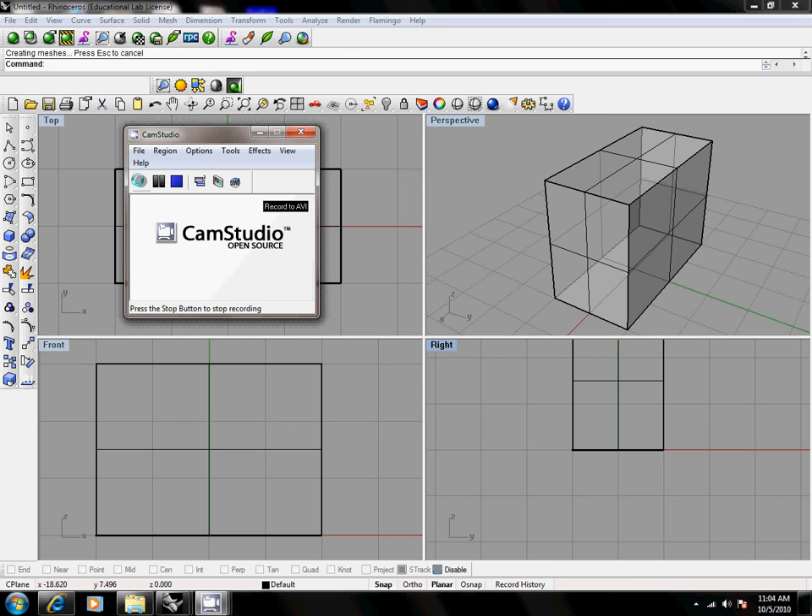Okay, so this is another tutorial for a new tool that you guys are going to use, called trim, and this is for making holes into surfaces.

So what we're going to do is open Rhinoceros, and we're going to choose small objects, centimeters.

In this case, what we're going to do is make a box, and then start creating holes around it, so we can simulate a computer. So we're going to maximize the top view, and I'm going to start creating a rectangle.

Remember that I should have snap and planar activated in order to do this. So I'm going to start at -20, 10, and make it 40 centimeters long and 20 centimeters wide. So here I created my rectangle.

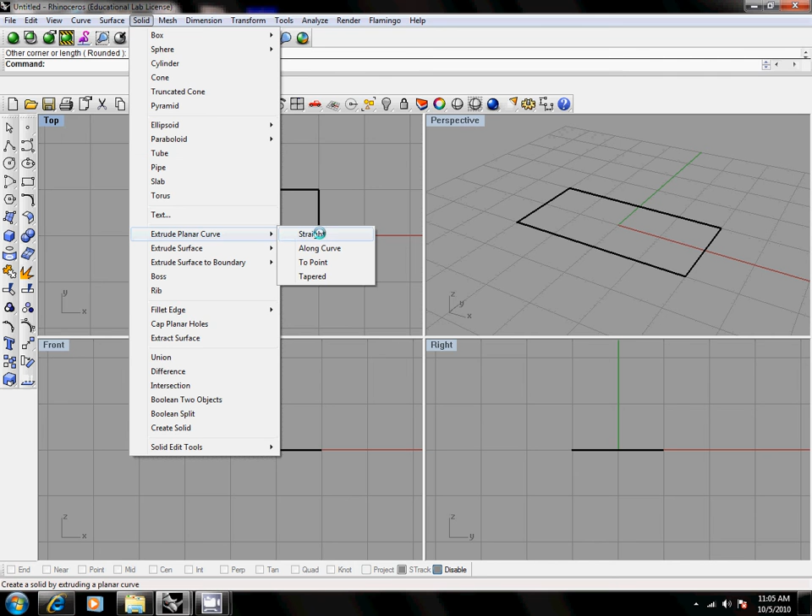Now I'm going to extrude this curve, extrude planar curve straight, and make a box. Remember to read the command line, it says select curves to extrude. So I select the curves, press enter, and extrude them 30 centimeters. On the front view I can count the 30 centimeters, and here I have my box.

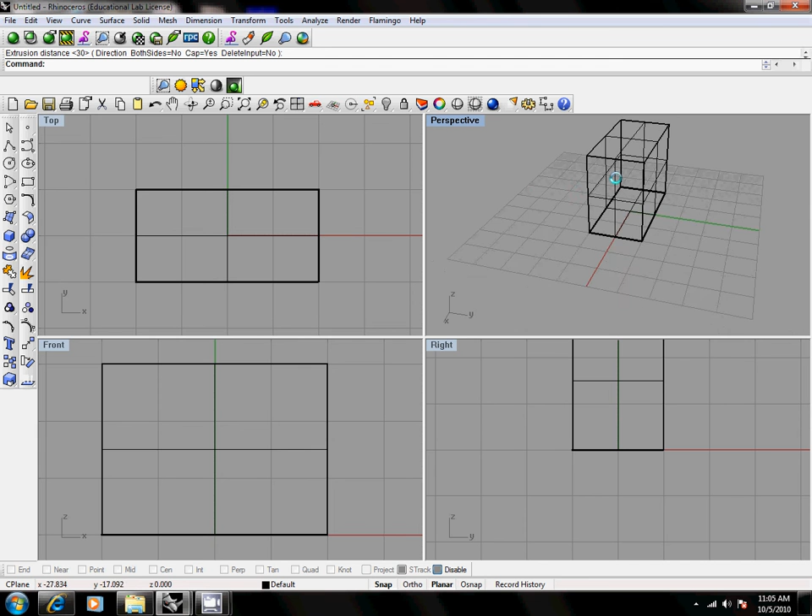If I right click on perspective, I can choose ghosted, so I can see a better view of the surfaces. So what I'm going to do is, I have my PC or my computer case, and I'm going to start making holes that will simulate the ones on my computer.

On the front view, what I'm seeing is actually the side view of the case. So I'm going to draw all my buttons and holes on the right view. I'm going to maximize the right view, and start drawing different holes.

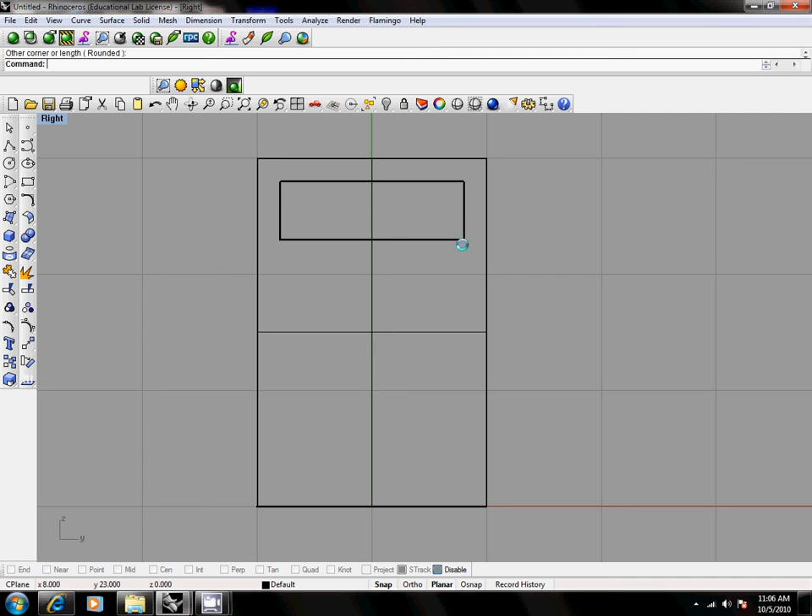So I can make a rectangle over here, and then I'm going to make a circle for the jacks. These are pretty big, but you guys can make them smaller - it's for you to know. So I have the jacks over here.

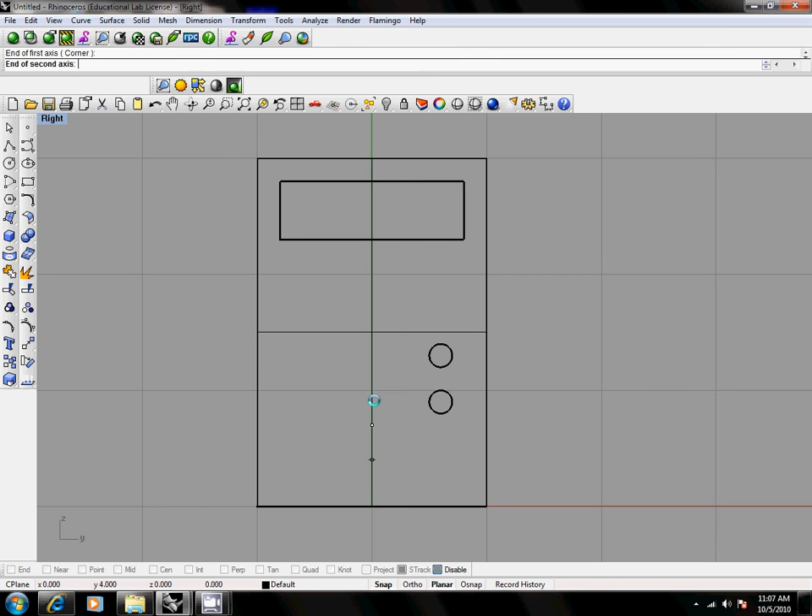Then I can make an ellipse for the power button. So what I'm going to do is make holes out of these 4 curves.

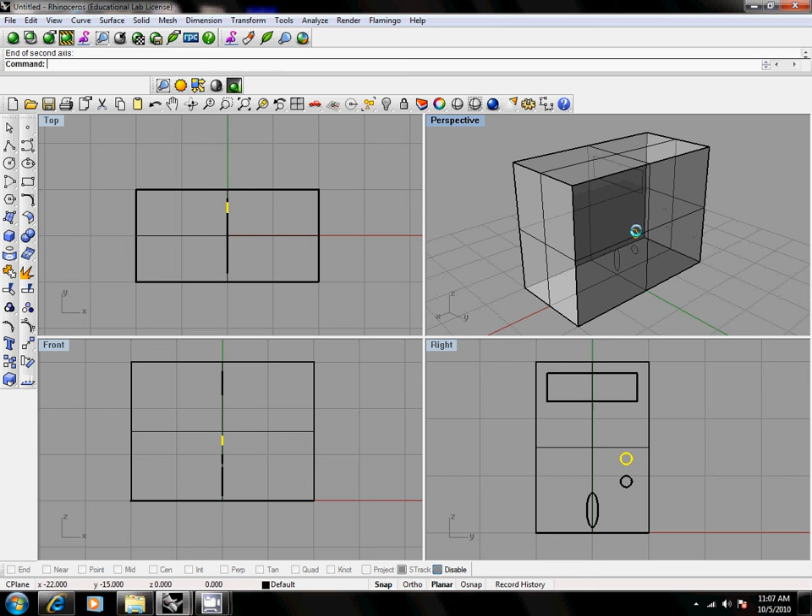The first thing I have to do is take them out of the case, because they're probably drawn inside. As you see, we have them here inside the box, so I'm going to have to take them out. I'm going to select these 4.

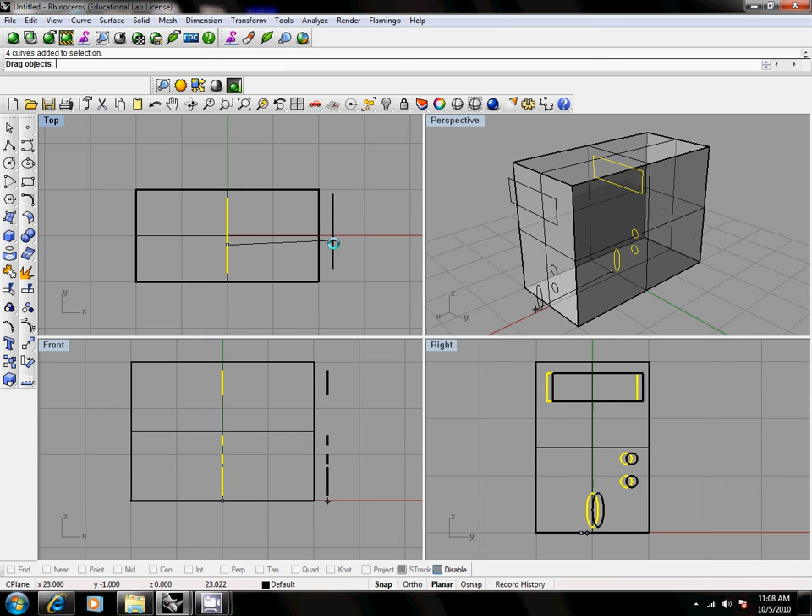You can either do it from the top or the front view, and I will take them out of the box. Very good, now as you see, I have them over here.

So what I'm going to do is use the tool called trim. It's located on the left panel, you can either click on it or type trim, and the command line says select the cutting objects that you would like to trim.

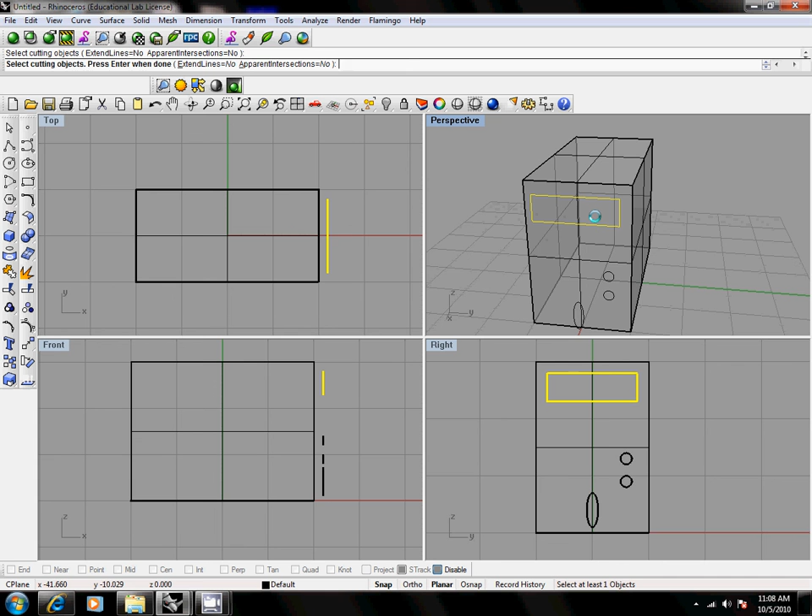My cutting object, first thing, would be this one, the CD case. After you finish selecting the cutting object, press enter. Now here's the tricky part - you have to maximize the perspective, and locate it as if you were perpendicular to the surface you are going to cut.

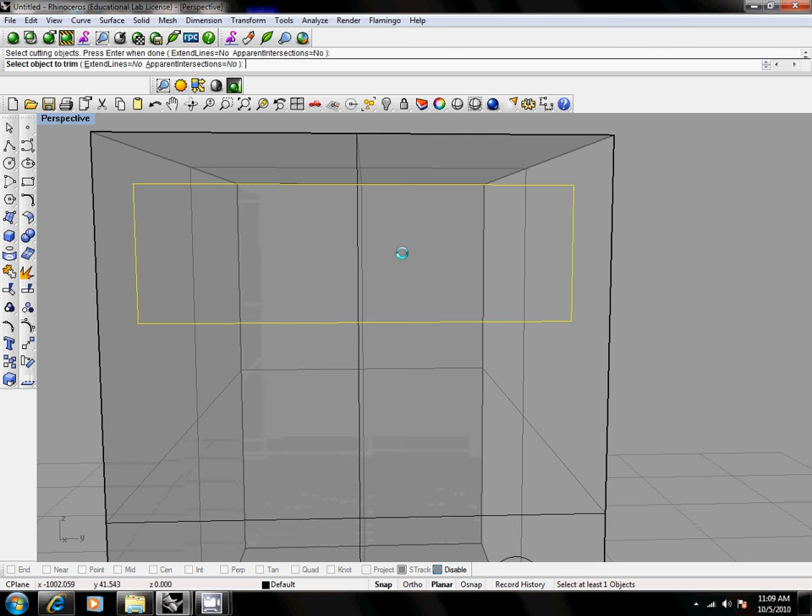So basically what I'm doing is zooming in so I can assure I am looking perpendicular. So I'm going to click inside, and look - what I did was create a hole inside the box. Now I have a hole inside the box.

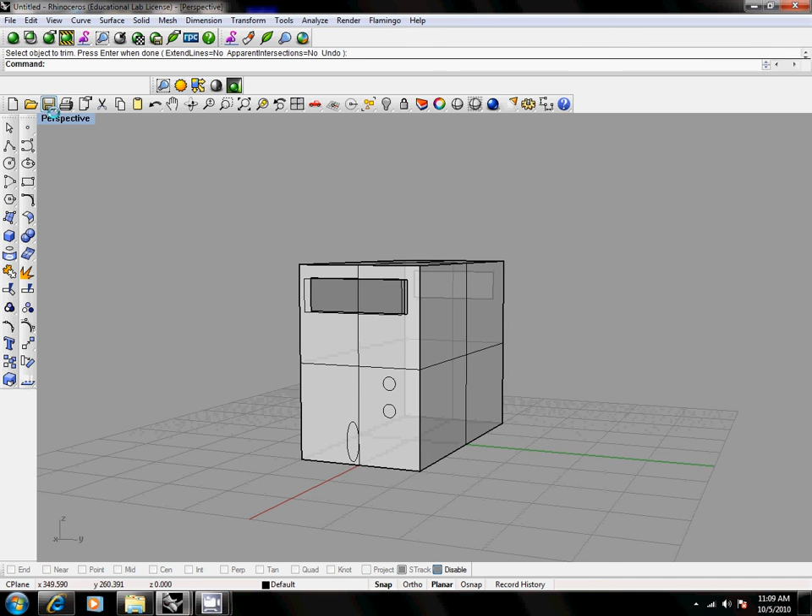Now after you finish trimming, you can press escape so you can do it with another one. You're going to do the same with all your other holes, and then you can start trimming.

If when you trim it doesn't open a hole, it just disappears the whole box, then you can press Ctrl Z to go back and try it again.

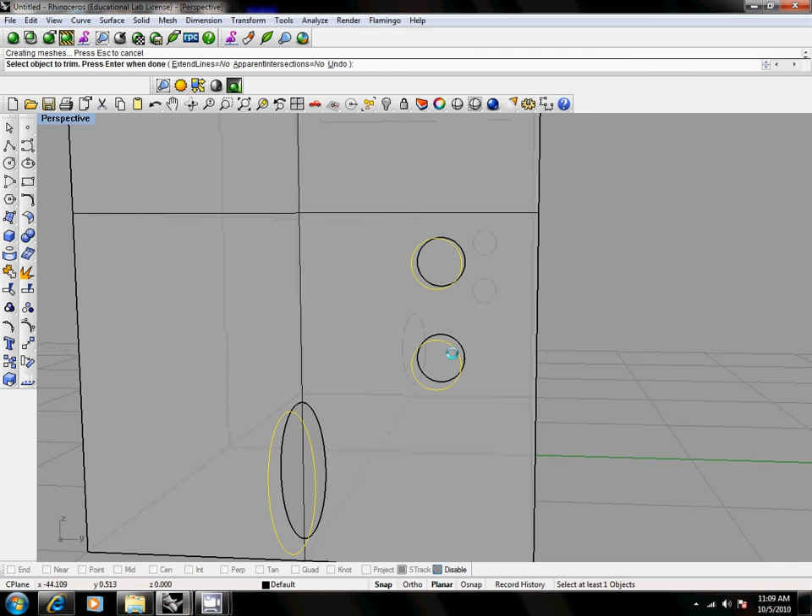Okay, so here I was able to open this hole. Now I'll do this one. I'm missing - remember to always put it perpendicular.

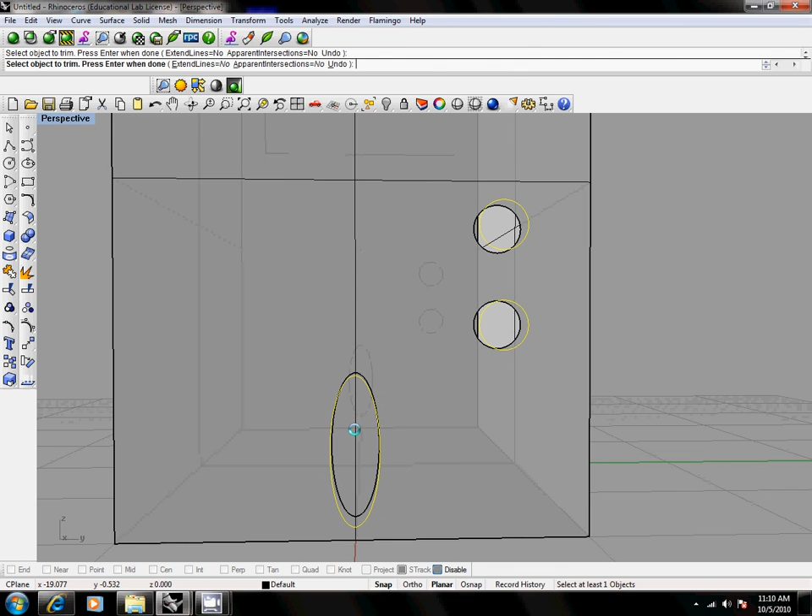Put it perpendicular and cut. Very good, so now I have my holes. I have the 4 holes that I created.

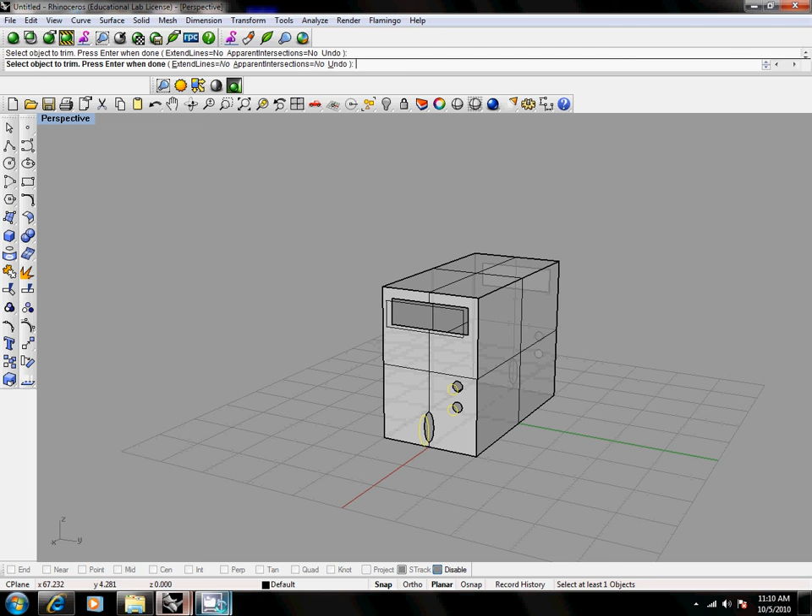And then from there, you guys can start making some other stuff that you already know, like trim, like filleting the edges over here, and you can make a box that you can put inside.

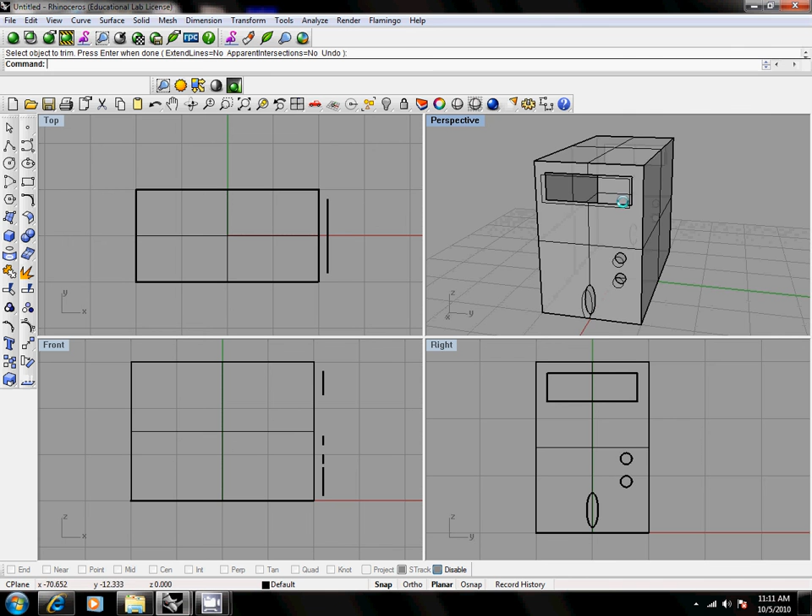And here, if you have the button - here you have the 2 buttons, or the 2 jacks, and here you have the power button.

What you do is select these curves, the curves that I used, and use this light bulb over here so I can hide them. Now I can have my box here.

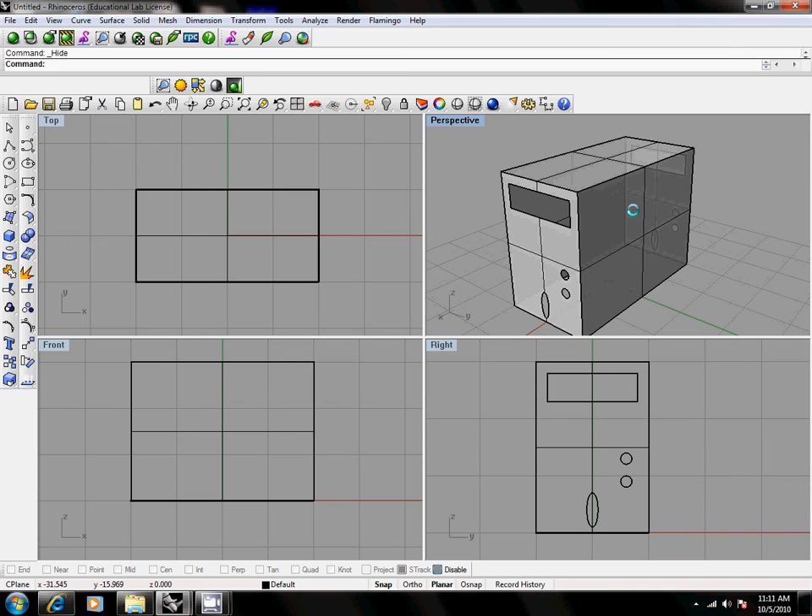Now if you guys want to add a couple more things, you can fillet the edges and start rendering. So that was my presentation for trimming through surfaces. Now you guys can create yours.

Video tutorial for you guys. In this case, I'm going to start talking about a tool called Trim that can create holes in different surfaces. So let's open a new rhinoceros file.

And we are going to choose small objects, centimeters. So basically what we're going to do here is create a very simple box, and I'm going to show you how to make holes in it.

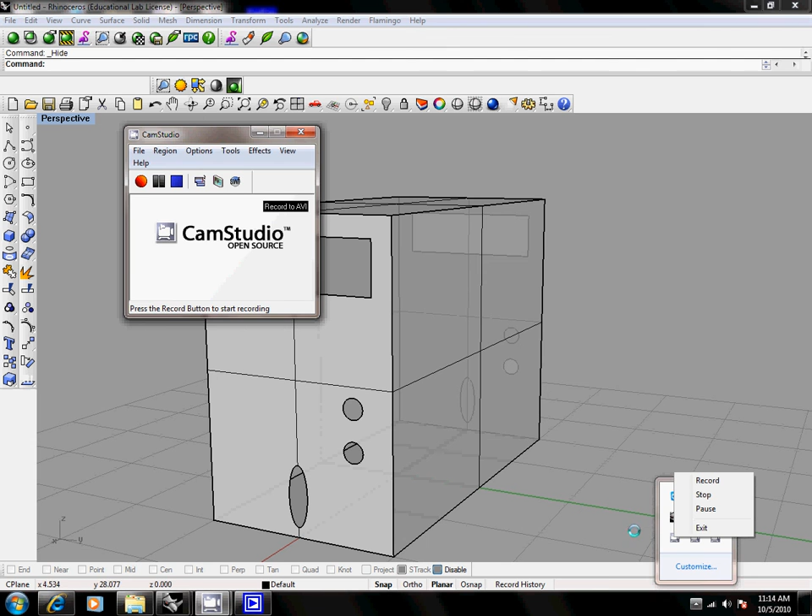Now this curve, I will extrude and make a box out of it. Remember that I should go to Solid, Extrude Planar Curve Straight, and the command line says select curves to extrude. I will choose this curve and extrude it on the front view, 30 centimeters. Now I have a box, and I can see it on the perspective view.

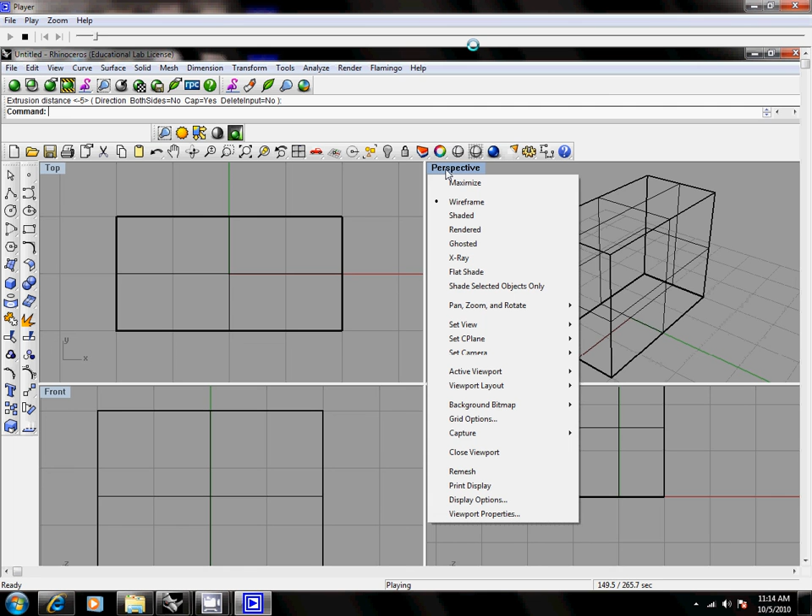Remember that if I right-click on perspective, I can choose ghosted, so I can see the surfaces.